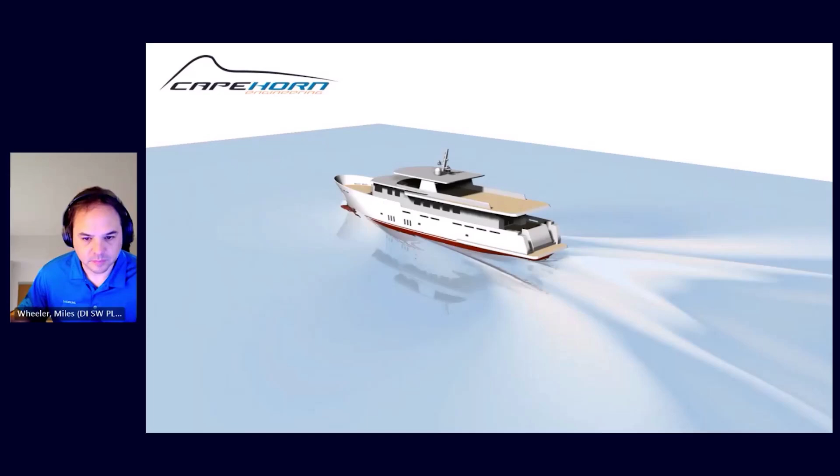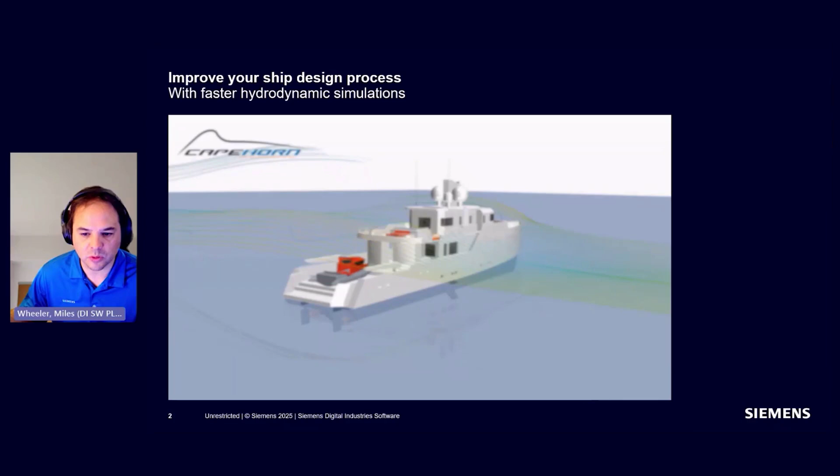Before diving into the webinar topics, let me briefly give you the context for this webinar before I show you why your next environmentally friendly ship design is closer than you may think. With the ever-increasing pressure on the commercial market to reduce emissions, you need to make radical engineering decisions faster, and for that you need simulation tools that are fast, easy to set up complex problems, can be automated, and allow you to embed best practices that can be shared across your organization and help accelerate your productivity.

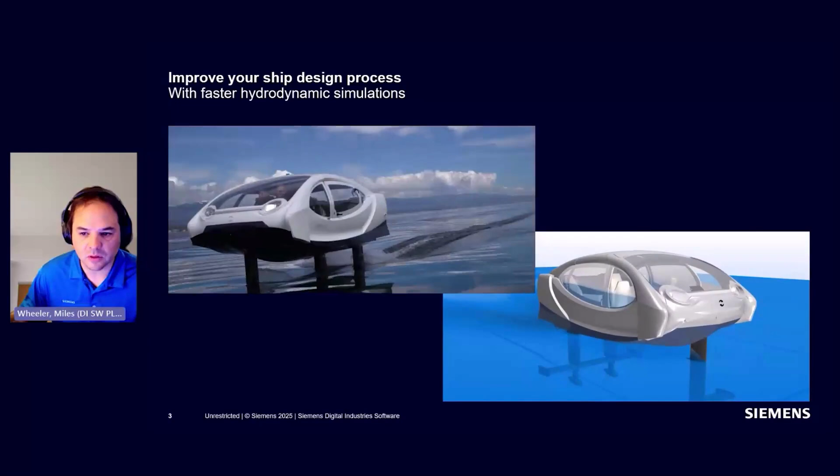Once the right tools are in place, only then can you start to consider hundreds or even thousands of trade-offs and designs early and often in the development process, which will then allow you to stay ahead of your competition with innovative designs and better performing vessels, all while reducing your cost and time to market. And of course, you always want to work with real case scenarios, like you see here, this example of a novel concept called sea bubbles, with these videos being provided to us by the courtesy of Cape Horn Engineering.

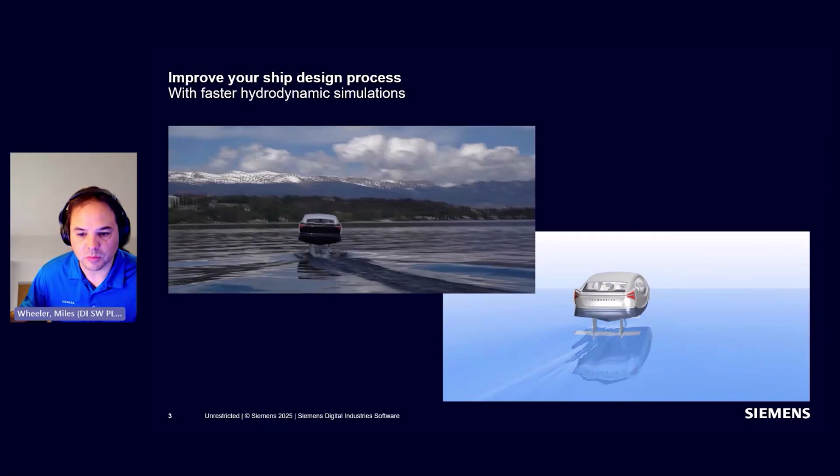Now, I wanted to take a deep dive into the enabling technologies behind the simulations we just saw. Let me introduce myself. My name is Miles Wheeler, and I'm a Senior Marine Application Specialist here at Siemens. I primarily focus on the use of Simcenter STAR-CCM+ for the maritime industry.

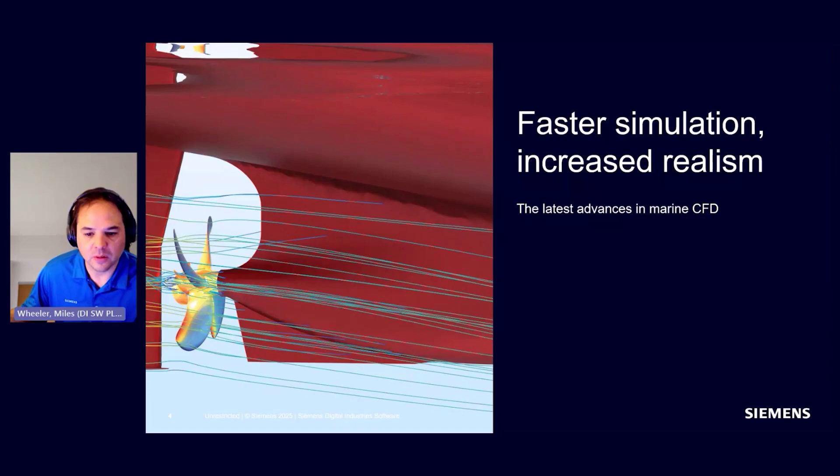Then, over the years, tools have been introduced that make it easier than ever to create your simulation models. Surface wrapping, automated meshing, pipeline workflows. The advancements in available tool sets allow people to build highly detailed models much more easily and quickly. But it still required a highly knowledgeable CFD expert to build and run these models. Although the simulations were easier to build, they did take days and days and days to run.

But what if I told you we were at the turning point to the next step? Automated and faster workflows, complex simulations with the touch of a button. Well, that is what the focus of this presentation is about. And I plan to focus on how you can get better information and increased realism out of your simulations, all while speeding up your simulations from weeks to hours while using easy to use templated setup files in our latest technology.

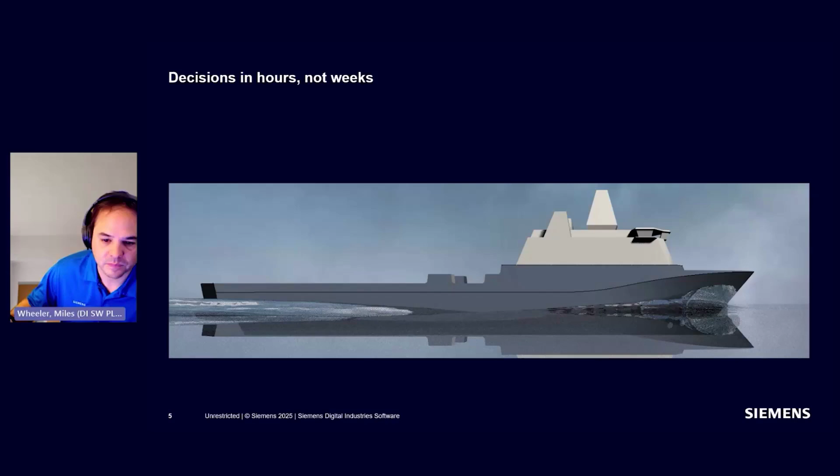To illustrate my point, I first want to walk through what most people would do to set up a standard case or ship resistance case in a CFD tool.

First, we have to import the CAD model. We have to ensure it is oriented correctly. We need to confirm the quality of the CAD. Then we have to determine or apply the mass properties to ensure the model is placed just so in order to have the simulation run smoothly.

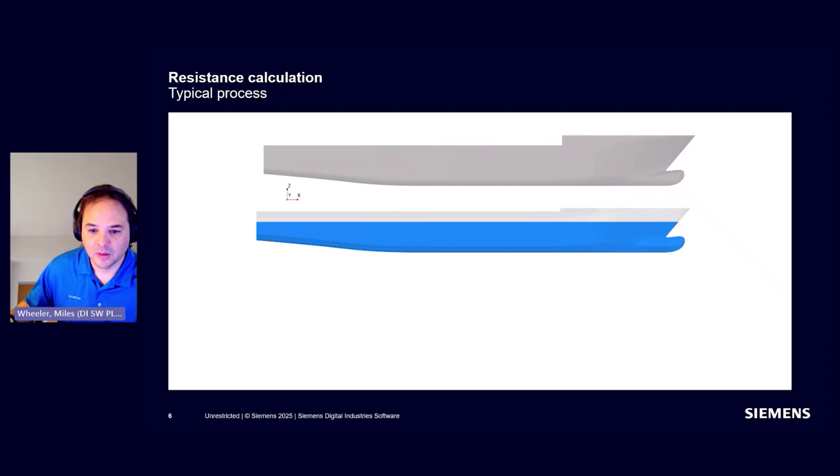We have to determine the hydrostatic properties such that the hull center of buoyancy is aligned with the center of gravity and is displacing the appropriate amount of water. Then we have to think about how to build our mesh. For marine cases, we have to think about how high the generated waves will be, the proper mesh transitions, and where the generated wakes will be.

This can be a cumbersome process with several hand calculations and typically about a dozen boxes to create the settings and capture all aspects of the model appropriately. But not only that, we also have to worry about what is going on in the boundary layer and the appropriate way to capture it. What are the appropriate Y+ settings? How can we smoothly transition the prism layer into the core mesh?

What is the appropriate cell size for this model? How can we build a mesh that is accurate but also runs quickly? And this can take several iterations and often requires a lot of thought. Then we need to think about the physics of our problem. We need to set up the solvers.

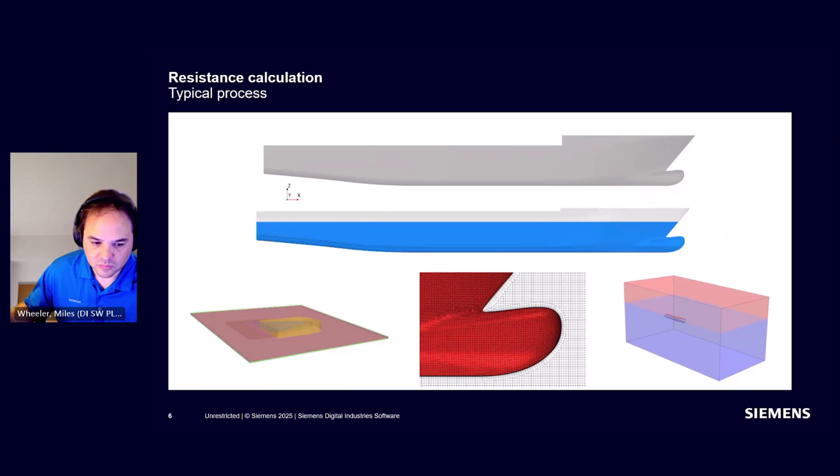We need to think about what type of turbulence models we want to use. What is the appropriate time step? We need to determine how to set up the free surface conditions and how to apply all of the relevant boundary conditions. But what if instead, all you had to do was input the CAD, set the draft and speed, perhaps add a propeller, and that was it?

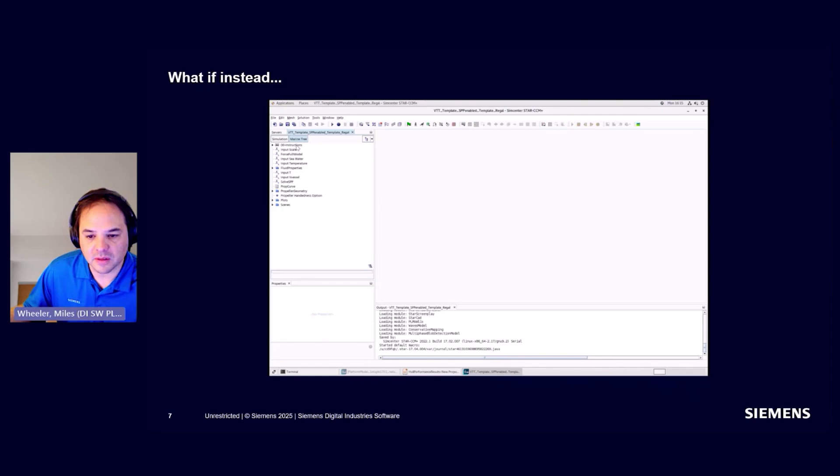Well, Simcenter STAR-CCM+ now has the full capability to take out most of the manual processes involved with building a CFD simulation via our parameterized template modeling capabilities. What we have here is what we call the VTT template, which allows a user to automatically run a resistance or self-propulsion analysis at any scale with just a few inputs and clicks of a button.

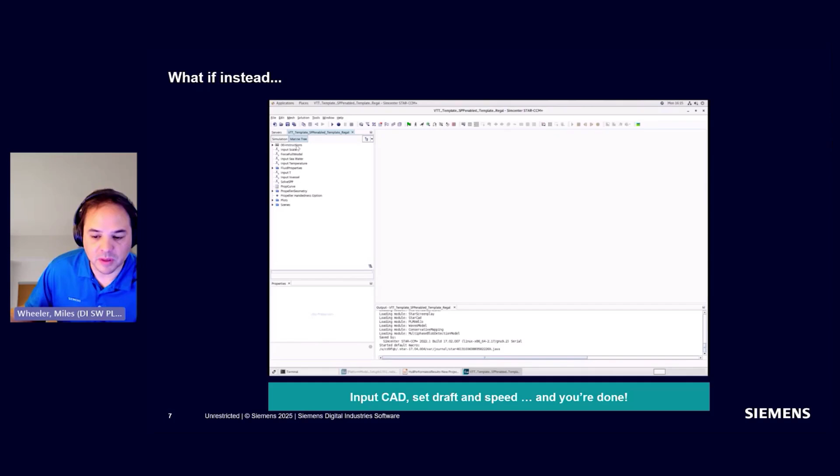Simcenter STAR-CCM+ has the ability to parameterize most things in the tree. And if you think about it, most of the meshing and pre-processing decisions for a ship are based on the geometry, the speed, and the displacement of the vessel. With the addition of these simulation operation tools we have in Simcenter STAR-CCM+, all of these calculations and thought exercises can be completely automated without the need for any scripting and embedded completely into your simulation template.

Here's an example of how it works. When we open up the template, we get a custom tree as well as instruction scenes that tell you exactly what you need to do. You can navigate and import your hull geometry and it will import into the scene. We'll then give you the dimensions of this part and you can easily scale it if you want to go from full scale to model scale or model scale to full scale. And all the relevant input properties are displayed in the scene.

We then have a few different options. We can have a full model or a half model, so you can assume symmetry or not. You can input the properties of freshwater or seawater via a table, or input them directly. And then we set the draft and we set the speed that we want to analyze.

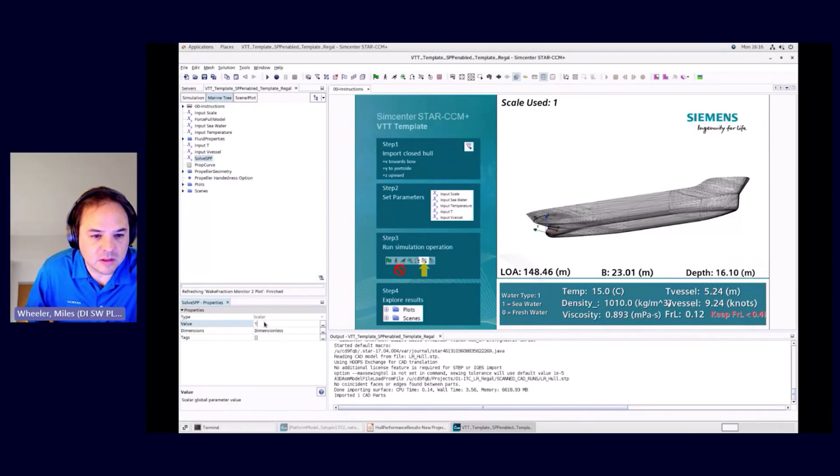If we want to run a self-propulsion calculation, it's simply setting a parameter that says, yes, let's include the propeller. And here we have what we call a virtual disk, which allows us to mimic propeller behavior with the use of open water propeller curves. And of course, we can then import those curves and change the dimensions of the propeller as needed for the particular problem. We can move its location and change its diameter and inner hub radius if we need to, as well as change the propeller rotation.

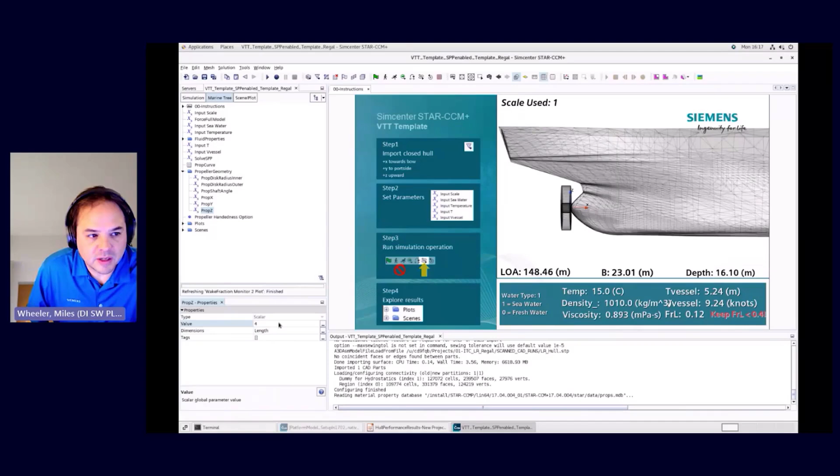And as you see, we really simplified the tree. We can reduce the model tree that is exposed to the user just to the inputs needed for the model. And once everything is input, just a few different inputs to set up a self-propulsion calculation, we run through these simulation operations, and that's it. All of your pre-processing, meshing, running, solving, and post-processing steps are automatically executed for you.

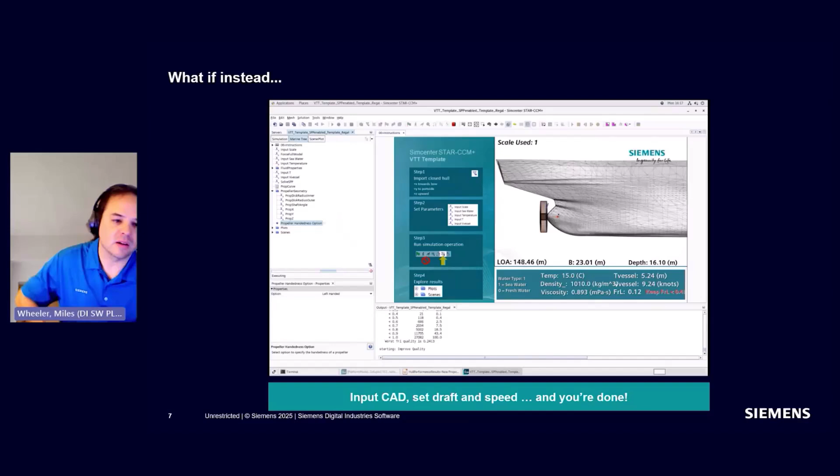But what's even better is the template is completely open, which means that you have access to all the controls you normally would if you built the model by hand in our commercial product. So if you and your company have any secret sauce or you want to embed your best practices into your file, you can do so. It doesn't require any new release, doesn't require a new script, doesn't require anything else except for you to go in and change it on your own.

You can make the change just as you normally would, and then you can continue using your template in the same manner. This is not a black box solution. It's completely open and transparent, and you have the ability to edit and do these templating steps yourself. Then, whenever you reload the model, as I mentioned, you can expose just the key inputs to the tree.

This helps you ensure that the best practices for your organization will automatically be populated and used, which will then ensure better quality control of your simulations and less time spent on policing others' work, because when people are working with this tree, they're not going in and changing solver settings, they're simply changing the boundary conditions of the model, and everything else is done exactly the same way, regardless of who is using the file.

And one thing I also wanted to point out is while we showed the manual setup process, the template can also be run in batch mode, which means that you can take any of the boundary conditions or perhaps even look at different hull files and set those up to be a parameter. And then that gives you a one-click solution to go from your CAD to your resistance or propulsion or powering calculations. It doesn't have to be a walkthrough wizard if you don't want it to be. You can have it be a one-click solution executing in batch.

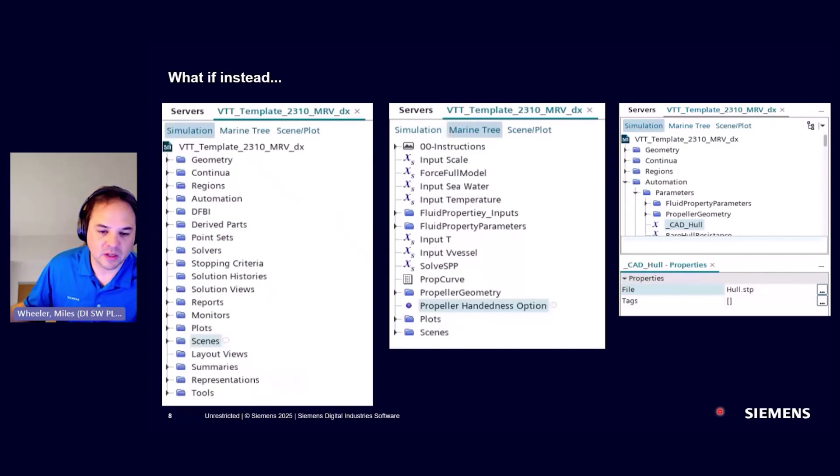And with the use of our design manager tools, you can do design explorations on hundreds or even thousands of designs, all with the same template file without having to even interact with it or open it if you don't want to.

Now, you may be thinking to yourself, that's great. The template saved me some pre-processing time. You have probably done something similar or have even seen templates before. But it still takes several hours to run a simulation. The pre-processing time is perhaps just a fraction of the total time it takes to get a CFD result. Well, that's actually, in my opinion, not necessarily true anymore. I want to introduce you to two additional technologies available in Simcenter STAR-CCM+ that will allow you to make your runtimes even faster. First one is multi-mesh sequencing, or MMS method.

The MMS method is simple. You define a final target mesh for your simulation. This is automatically defined in the template file. However, to develop the flow field, it can be cumbersome to have to do this on a very large mesh. So why not just do this on a coarse mesh with less cells? Well, we can. By using this coarser mesh, we can develop the flow field and wake structure much, much faster. We can then converge the mesh and map the solution to a slightly finer mesh and repeat the process until we reach our final target mesh.

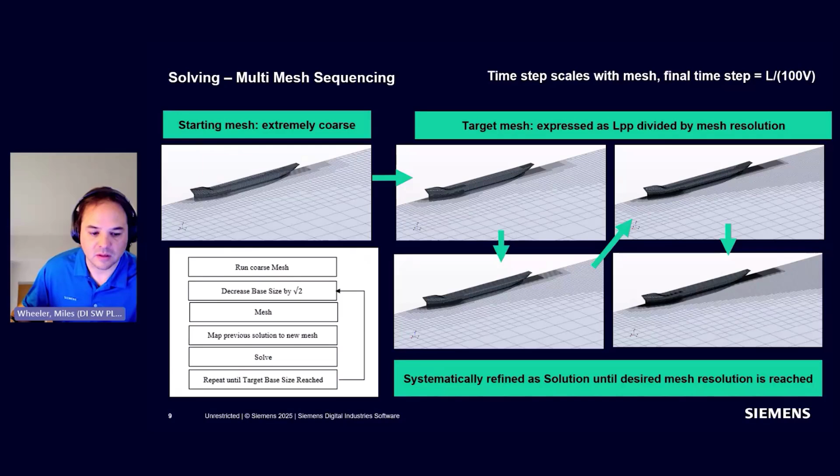And by doing this, we can save a lot of time of continuously using finer and finer grids while we develop the flow field, and only using a detailed grid once we have an almost converged solution as the initial condition. The best part of the method is that it uses simulation operations to automatically do this process. This means every setting is determined and embedded directly into the sim file, which means that the MMS method is script-free.

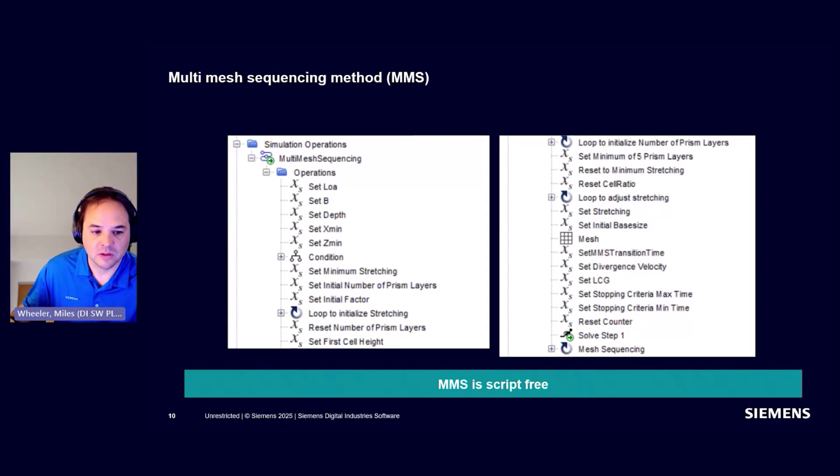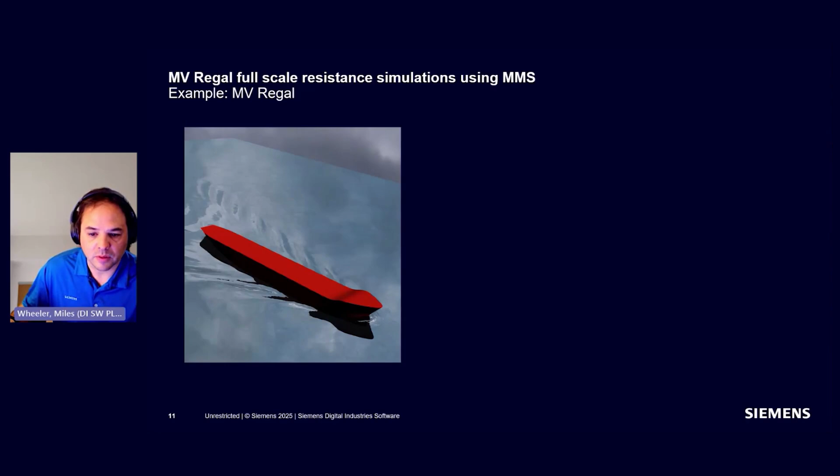And we have extensively tested the MMS method against our previous best practices for several different cases. One such case is the Lloyd's Register blind CFD benchmark case. And I wanted to point out a few things. First, the workshop is publicly available, so we can compare data freely. In this benchmark, we analyzed the resistance versus speed curve in calm water for over 4 speeds.

And we compared the median of the workshop data to our previous best practices and our MMS method. There's really no difference in the results with the MMS method, and the difference from the median is that it's a statistic based on submitted results. It's not actually comparing to any experimental data.

And when we actually did this benchmark, we noticed that the results from the MMS were over 2 times faster, and they're actually even faster on other cases, typically on the order of 4 times faster. So we have a very nice method that can be implemented completely within the simulation that has a significant speed up. This means you can either analyze over twice as many designs in the same amount of time, or perhaps only spend maybe half as much time in the office if you could get away with it.

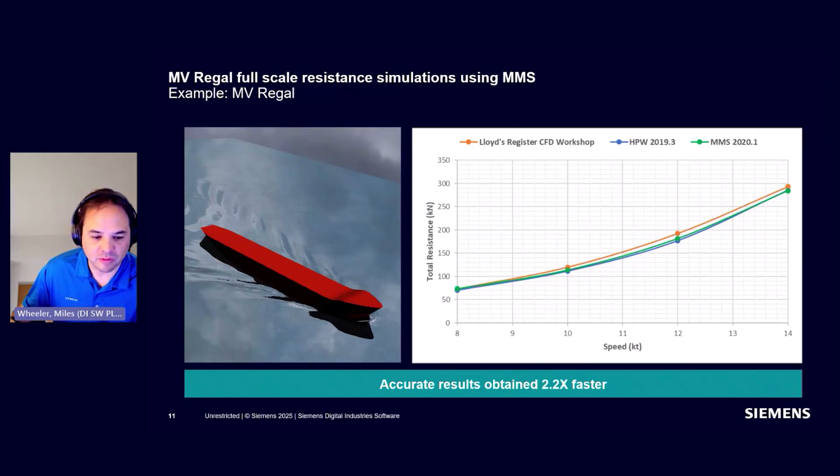But this brings me to our other addition, adaptive mesh refinement. Adaptive mesh refinement, or AMR, is another approach we have to making your simulations faster. AMR was just introduced into the code a few years ago, and we were very excited about it. AMR is a solver-based mesher that will refine and coarsen the mesh as the solution converges. This allows you to focus mesh in areas where you need it and allow you to have coarser meshes in areas where you don't. We can create any refinement operation with any of the field variables stored in your simulation.

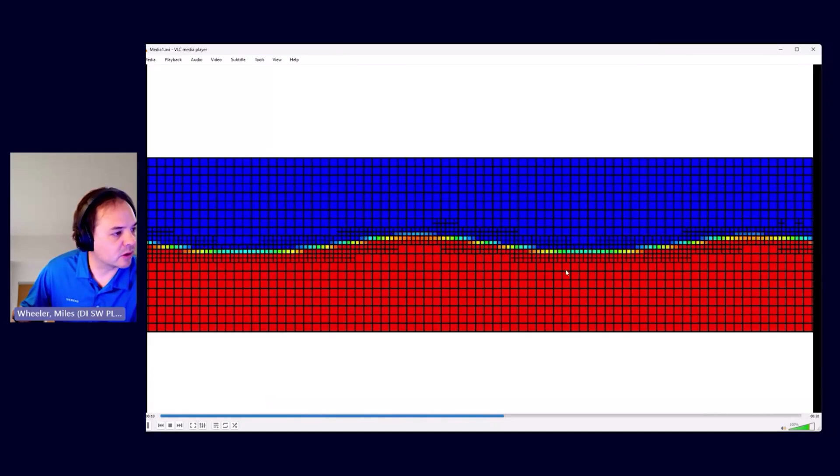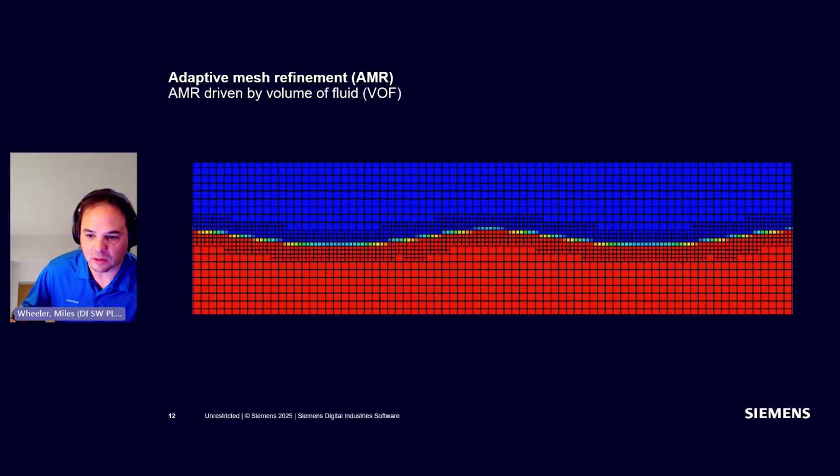But I wanted to point out two very useful model-driven applications for the marine industry that are unique to our software. First, our proprietary free surface model is being used to track and refine the free surface. The animation is not working in the PowerPoint, so let me pull it up really quick. It is here, so you can see that the free surface AMR is actually refining the head of the free surface. So that allows us to always have a nice crisp free surface as the solution develops. It's unique to our software. And it really allows you to maintain a crisp mixture with much fewer cells.

In addition, an overset mesh adaptive refinement scheme has also been implemented. What this does, it allows you to build very coarse background regions, and the adaptive mesh refinement will only refine in areas around the overset mesh. This will also help eliminate any of the overset errors you might typically encounter in these types of simulations. In this example, we can see a simple vessel maneuvering within a basin.

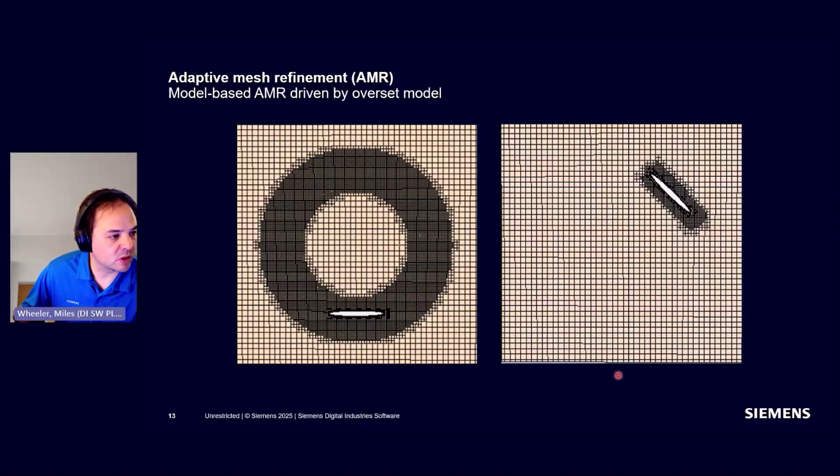On the left, you will see how we would typically have to create this case previously with the expected path of the vessel. But now, with overset AMR, we can leave a coarse background and we only need to refine as the object comes in contact with the background region, saving you a ton of cells, and overall it will save you a ton of time. But even better, in my opinion, is it takes the guesswork out of predicting where the vessel will go when you have highly dynamic cases.

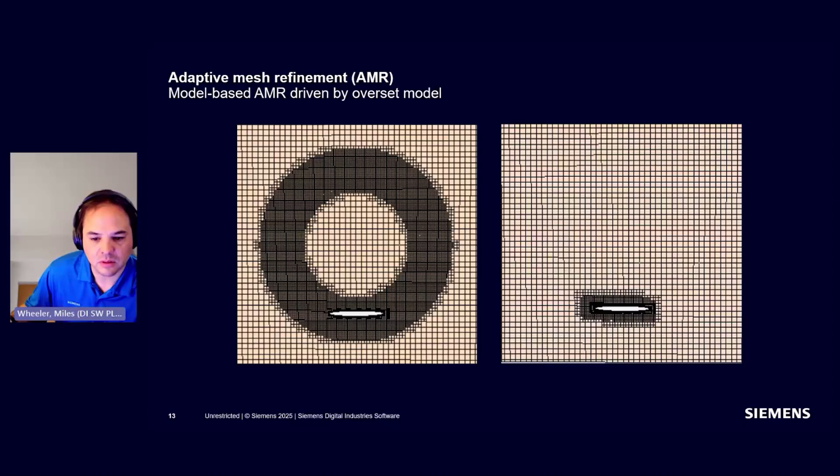And it allows you to also eliminate a lot of the overset errors you would get when trying to match cell sizes between the object and the background region. So overall, a very robust solution that saves you a lot of time. And in this particular case, we had 3 times fewer cells, which gave us 3 times speed up for the same exact case with very similar results.

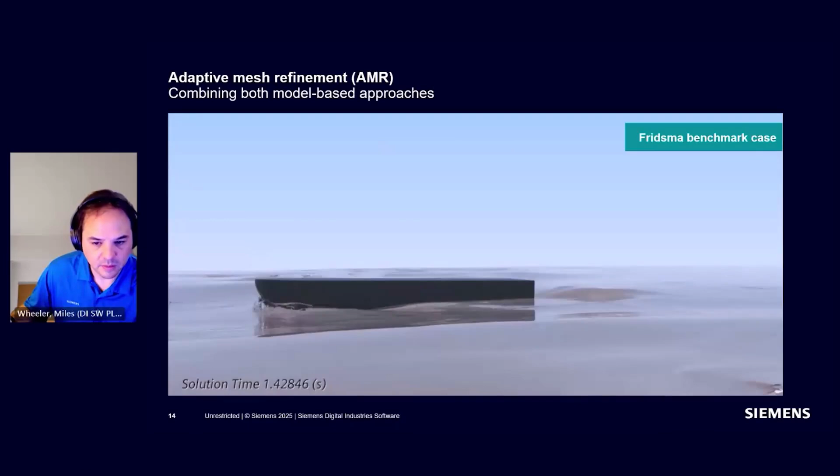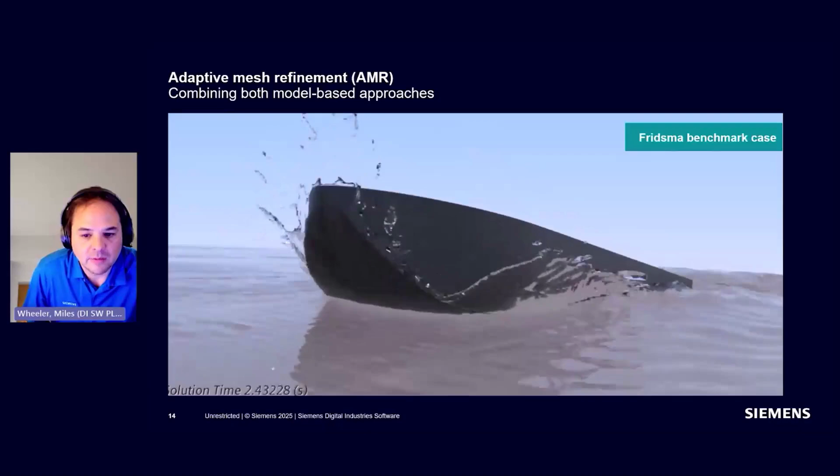Then we employed these 2 adaptive mesh techniques and we applied it to a previous simulation we had trouble with. With AMR, we were able to focus the mesh in areas where we needed it. And in this video, you can see a planing craft accelerate from rest to a steady state position with the use of our free surface and overset refinement implemented here.

They used consistent cell sizes across the bottom of the hull, since they did not previously know where the spray root lines would be on the hull. This is a standard way of addressing the problem, but due to the CPU constraints, this was as fine a mesh as they could create. And we were able to help solve this issue with the use of AMR.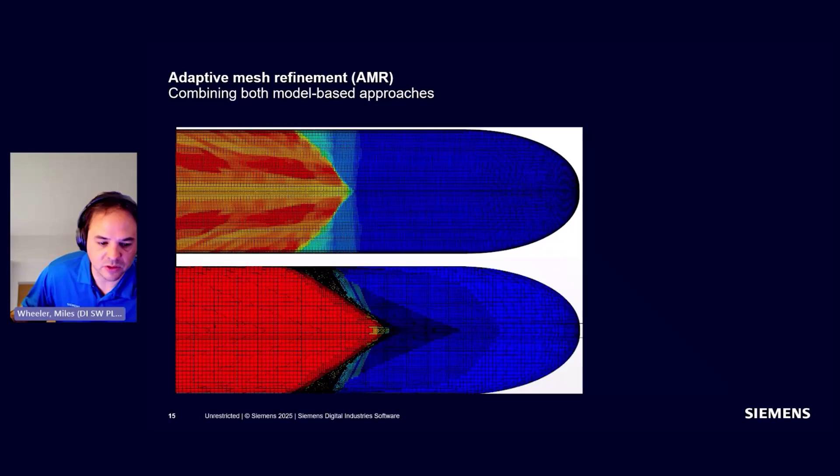Now that I showed you templates and the latest in our technology to speed up your simulations, I want to point out that Simcenter STAR-CCM+ is completely built from the ground up for design exploration. We have integrated CAD to solution in a single platform. We can link directly to most CAD packages and update designs from within our tool. We have robust and automated meshing, as well as pipeline and replayable workflows with our solution templates, as I just demonstrated. So what does this mean?

I'm talking about running hundreds of simulations at once to find the best compromise and trade-offs in the design. In this case, we're changing the design features of the hull for an offshore supply vessel by varying 14 hull parameters, looking for designs with smaller resistance, which ultimately result in improved performance.

And with the right choice of hull parameters, note the breadth of design and hull shapes that we are looking at here. And after variations have been explored, we see that we've achieved a better design than where we started, a full 33% reduction in resistance, significantly improving the hull performance. And this is what I mean when we talk about design exploration.

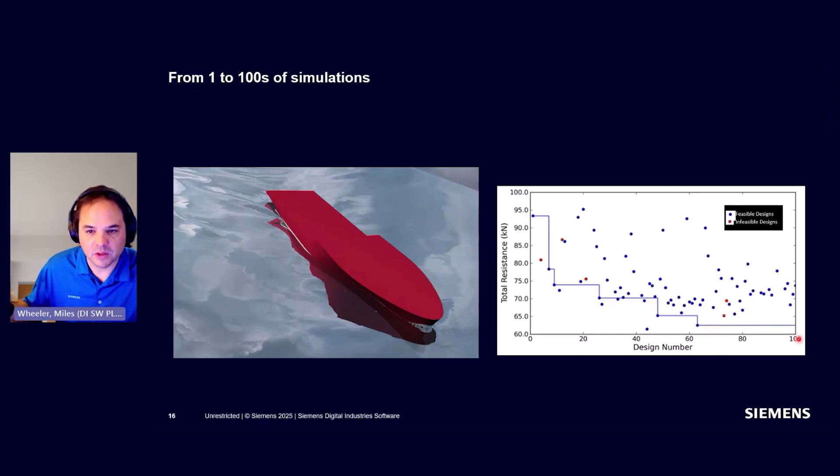I now want to walk you through a design exploration case that we recently did, in which we can go from the weeks typically needed to getting all of your data in just a few hours. Here we have what we call a multi-role vessel. This is a Siemens demonstrator vessel. It needs to be able to operate at several different drafts and speeds. As such, a full understanding of the powering or resistance requirements is needed over a range of drafts and speeds.

Particularly, we need to understand the performance between 5.5 and 7.5 meters in draft, as well as its operational performance between 10 and 30 knots. Using increments of 0.5 meters in draft and 2 knots, this would mean that we would need 55 different CFD simulations to generate the performance curves for these operating conditions.

And traditionally, this might sound a bit problematic. A single data point would take several hours, a full data set for a vessel would take several days, and the full resistance profile over multiple displacements would take weeks to do. However, with cloud computing, our Design Manager tool, and the power of our on-demand licensing, we can run all these cases while we're at lunch in just under an hour. So let me show you how to do it.

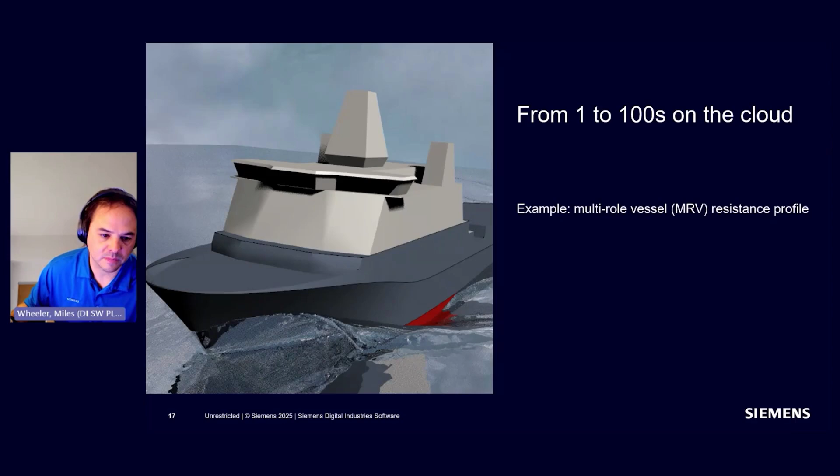I just demonstrated how you might be able to speed up and automate your simulations. And now I want to talk about how to harness these gains in conjunction with our Design Manager template file. In this video, I'm going to show you how easy it is to set up a design sweep in our Design Manager tool. We simply start off with our template. We right-click to get to a Design Manager session. And it's worth noting that doing sweeps in Design Manager does not involve any extra licensing costs.

Then we can grab any parameter defined within the template. In this case, we're interested in the speed and the draft. We grab those, and then we set up the range of each parameter. So here we've selected the parameters, and now we can give it the range that we want. Between 5.5 and 7.5 meters, and we want increments of 0.5 meters. Similarly, we can now input our speed range between 10 and 30 knots, and we want 2 knot increments.

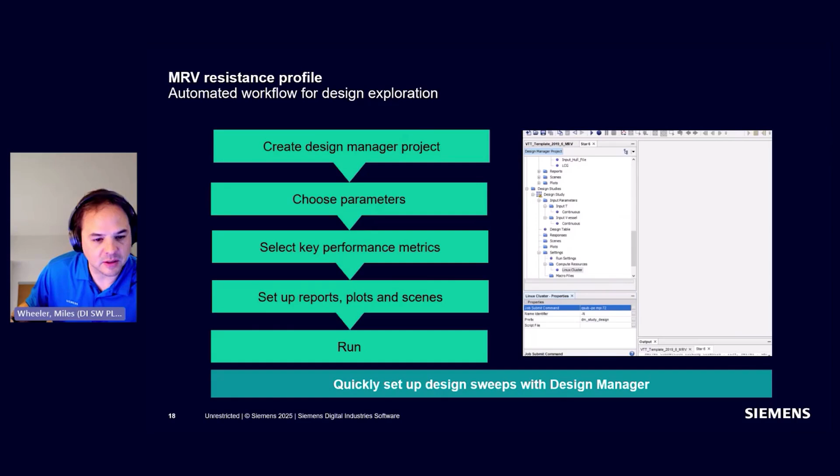And then we can set up our run settings. We want to run these on our Linux cluster, or whatever hardware you have available to you. We want to save all of our simulation files and our log files, and we want to run 55 designs at one time. The Linux cluster then tells you exactly how to submit it. That's our submit script. And this will then allow you to run all these designs at once on our Linux cluster.

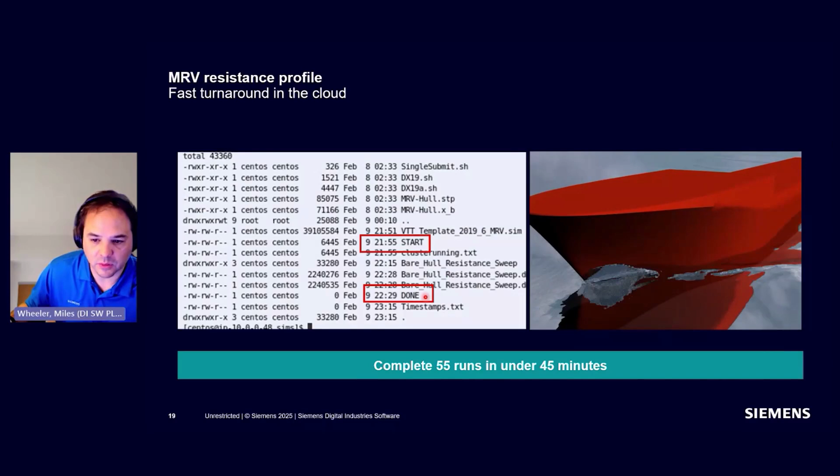Then with cloud computing, you can get as many nodes as you need. It allows for easy on-demand compute nodes, and you can build a cluster and only pay for the compute nodes as you use them. Once you build a cluster, you can easily copy files and submit the Design Manager job, and it's as easy as typing in a simple command to submit the file. And then in about 5 to 10 minutes, your cluster will be built. All your jobs will be running. And in 45 minutes here, it actually completed all of the runs. The results are stored in an easy to manage file. We can download the file back to our machine.

While we ran very quickly, I also wanted to point out a few other things. We used our on-demand licensing scheme for this study. Our Power on Demand licensing scheme is priced by the elapsed simulation hour, meaning you are not paying extra to run on more CPUs. You can use all the CPUs you want for your simulation, and the cost is the same.

In fact, you'll actually save some money if you run in the most efficient way possible, and you'll get your results even faster. In this example, I ran on 70 cores per simulation, and all runs finished between 15 and 30 minutes. The total cost to perform all 55 runs was under $500 US, with price per run varying between $7 and $14 per simulation, which I personally think is quite reasonable.

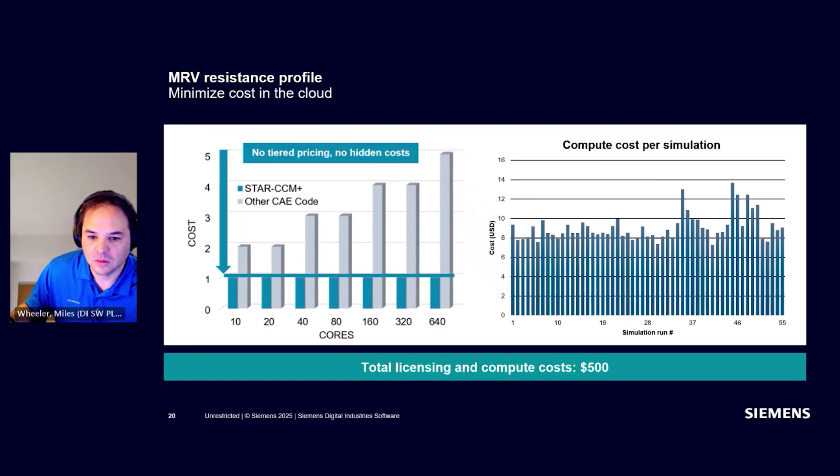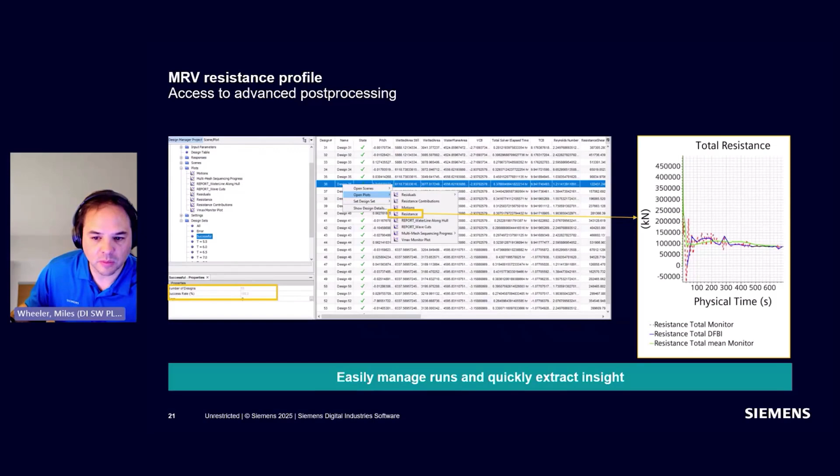And we can look at the file, make plots, and confirm the results. In this case, it's clear all runs finished successfully—we have all these check marks here. All the results are stored in an easy to read table, and you can pull up all the plots and images as you scroll through results, all within one database.

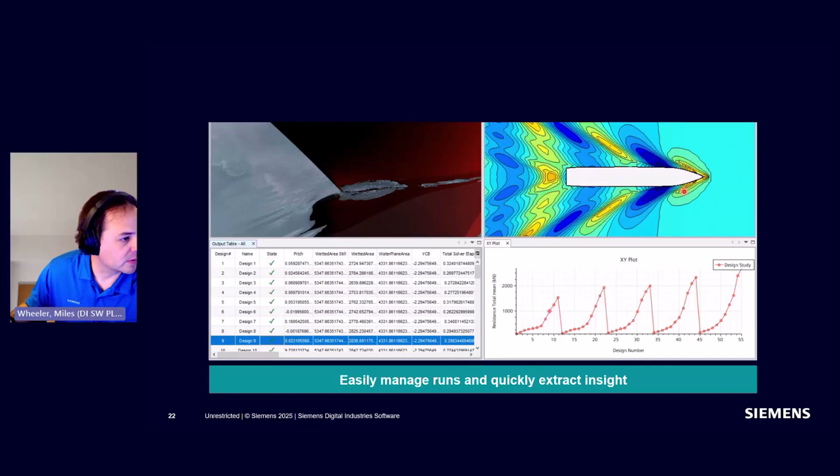Which is what we're going through here. We can look at each individual design, see what the resistance is, take a look at the generated wake, look at the bow wave. We can look at really whatever metric or visualization we want, all within a single environment, which allows you to really easily understand your results as you go through them.

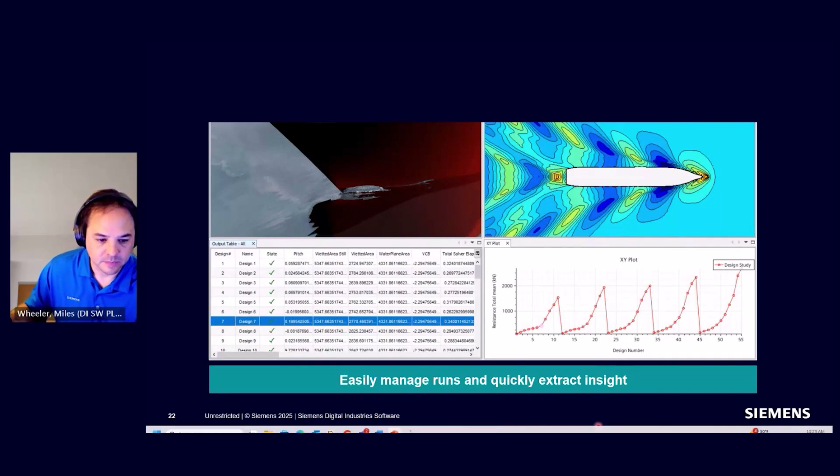Now, let's switch gears. Now that I've shown you ways to improve your productivity and save time, you will probably have the time to do more sophisticated analyses and increase the realism of your simulations.

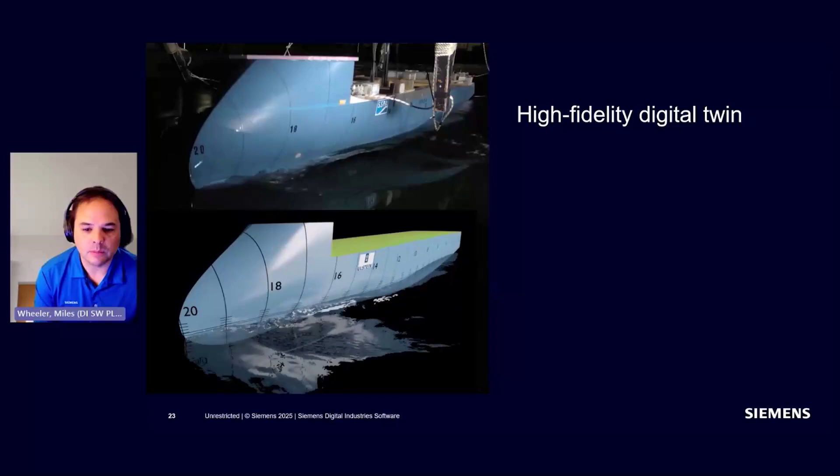The first example I would like to show is some work done by our customer CETENA, who simulated the launching procedure with the help of our engineering services team. The ship that needed to launch was the largest ship ever created at this particular shipyard. The size of the ship, the departure angle, and shallow water in the bay had the shipyard worried about a successful launch.

There were clearance issues critical to the concern of the propellers and rudders. The shipyard significantly relied on hand calculations that assumed large margins of error, and these processes were okay, but given the size, it was not possible to rely on these methods. The traditional launch calculation methods were purely static and neglected free surface deformation or wave pattern, interaction with the seabed, surrounding structures and the quays, and any inertial effects. Detailed computation of resistance and effects of the appendages and propulsors were not carried out with these older methods.

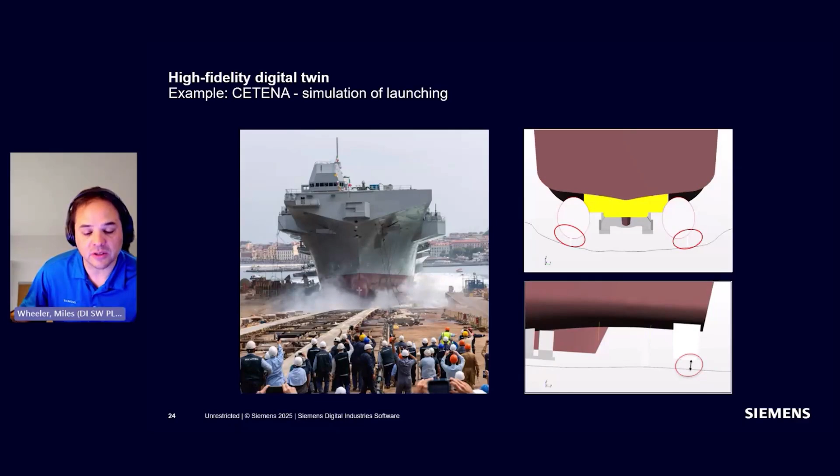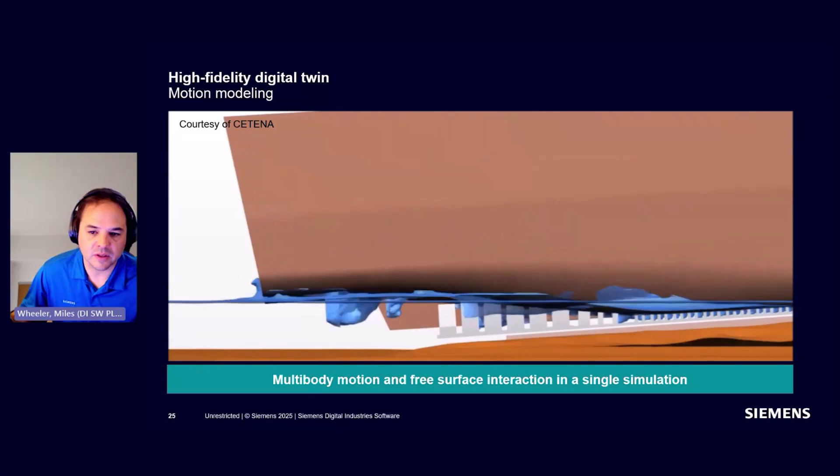So with their worries, they needed a more high fidelity analysis. They turned to Simcenter STAR-CCM+ and our Siemens engineering services team to help them out. They ran several simulations with contact, complex motions, appendages, multi-body interactions, and free surface interactions to figure out what set of parameters could produce a safe and successful launch.

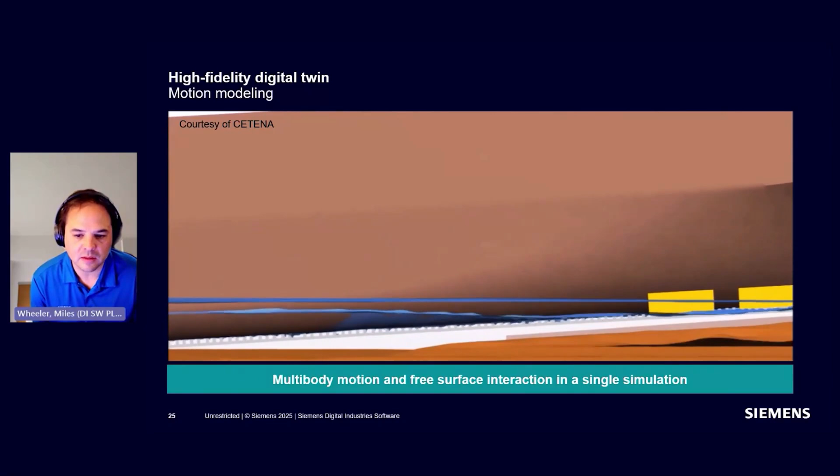As you can see, there were tight clearances on the worrisome part of the bay floor, where the simulation provided enough fidelity and insight to figure out what could possibly work. It was determined that a safe and successful launch was achievable based on simulation. At the end of the day, the shipyard was able to successfully launch the largest ship it ever produced in some terrifyingly shallow water, not much of an issue.

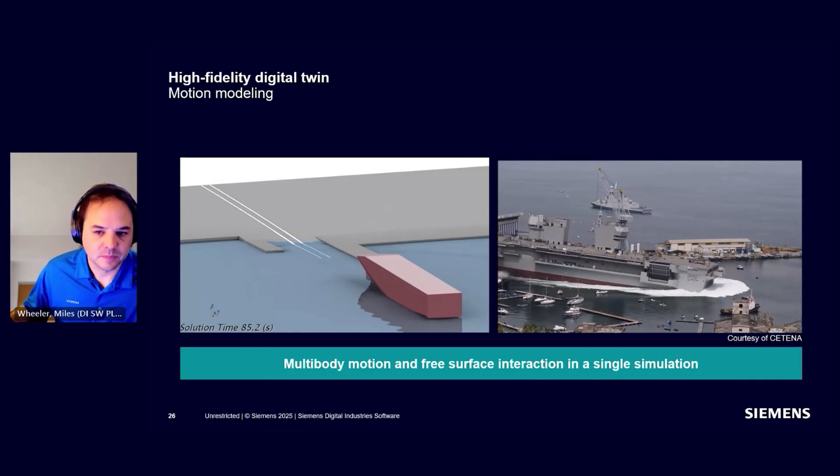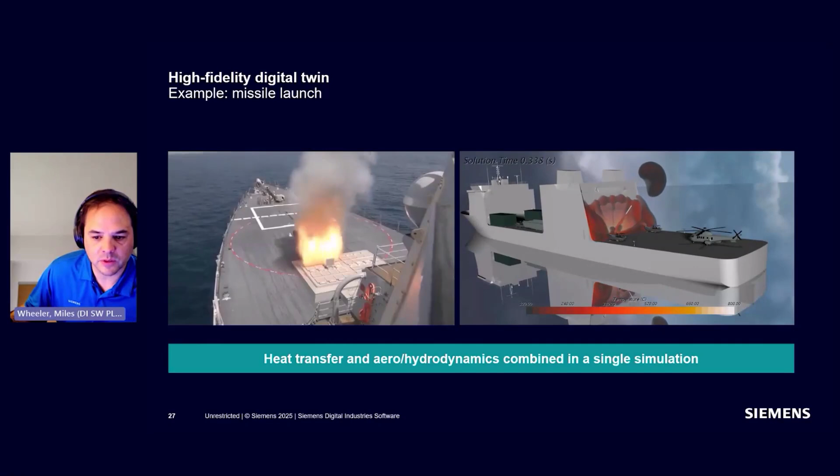Next, I wanted to point out our capabilities for rocket launch combined with hydrodynamic and aerodynamic simulations. Here you can see a YouTube video of a rocket launch by the US Navy. The fumes and flames are very high before the rocket is even launched. We can simulate the same conditions including heat transfer, compressibility, and high-speed aerodynamic problems in conjunction with our hydrodynamic capabilities, all within a single simulation.

We can see the generated shock waves and how they might affect important things on deck, such as helicopters, cargo, people, what have you. And we can also look at the plume effects, giving us great physical insight into any type of launching situation.

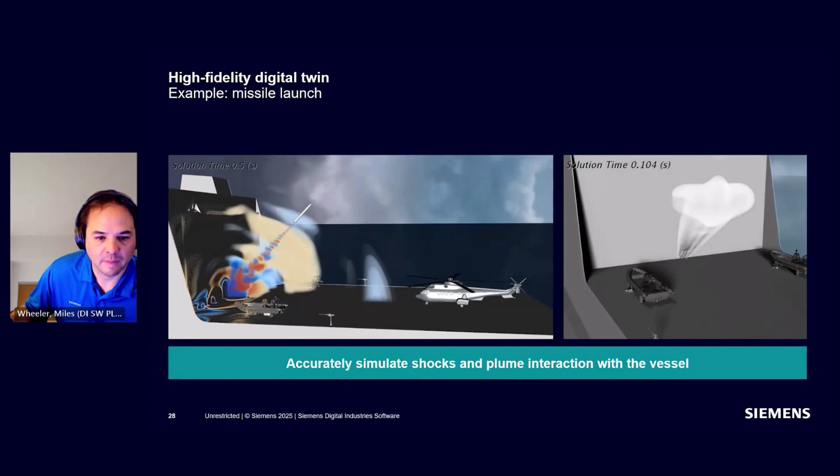We can see how the gases are dispersed on deck and see if that might affect anything critical on board.

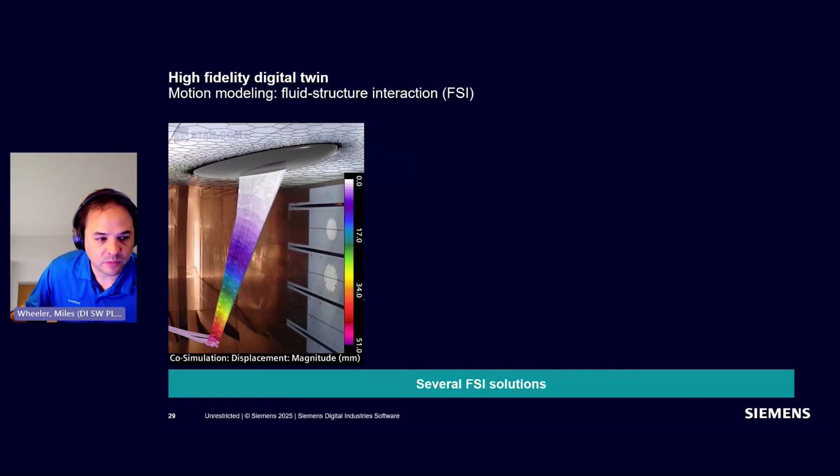The other thing I would like to point out is some of our fluid structure interaction capabilities. We have one-way coupling, two-way coupling with SimCenter Nastran and other finite element codes, and two-way coupling embedded completely within SimCenter Star-CCM Plus.

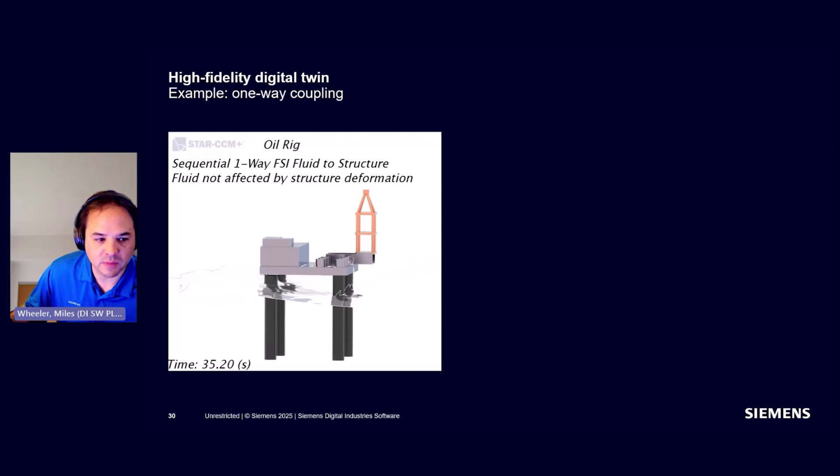In this animation, we can see how we can optimize the structure with our one-way coupling techniques. If the wetted surface area remains relatively unchanged, we can map the wave impact onto the structure and optimize the structure using input loads from our design exploration tools.

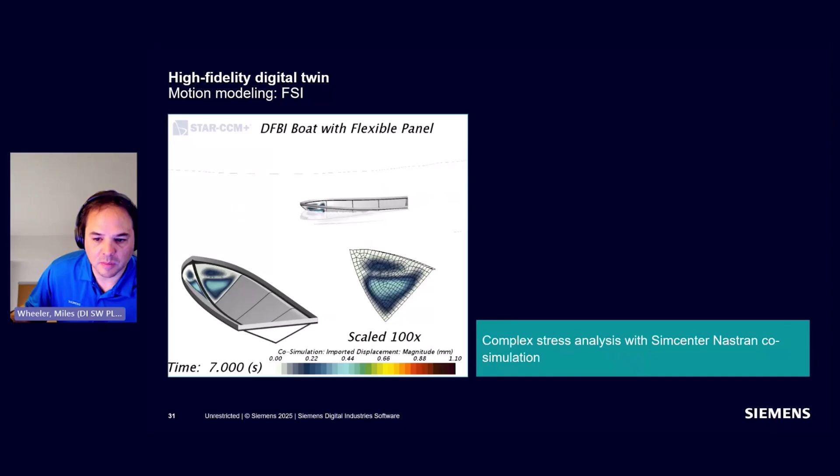This is the type of fidelity insight that can be looked at with our seamless SimCenter Nastran and Star-CCM Plus two-way coupling offering. There's a socket-based coupling that can link any FEA model with our high fidelity CFD capabilities.

But SimCenter Star-CCM Plus also has a 3D solid finite element solver that can easily map with our fluid solver. This allows for seamless FSI integration into a single simulation platform.

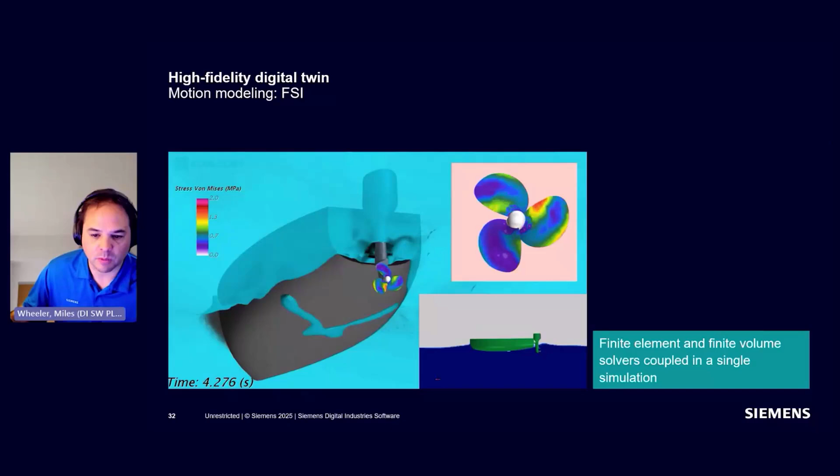In this case, we can see how the deformations of the propeller might affect the thrust and the corresponding motion of the vessel. For our advanced FSI capabilities, we can get true realism into our designs by understanding how the structure movement can affect the performance of the vessel in several different scenarios.

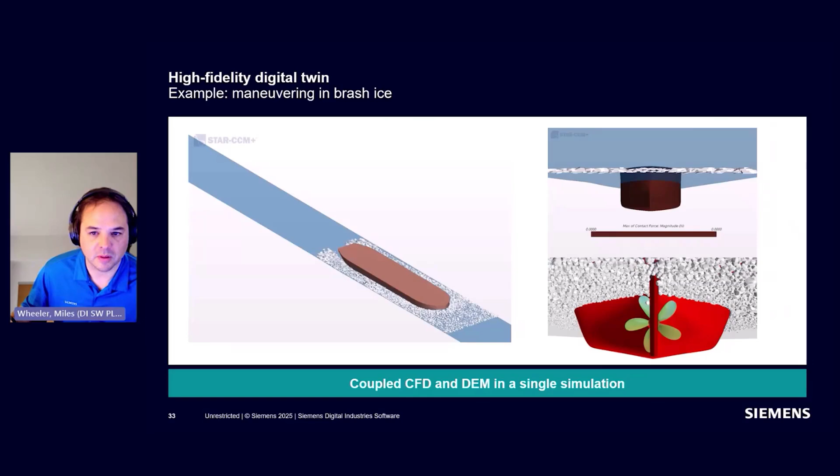SimCenter Star-CCM Plus also has the ability to be coupled with SimCenter Amesim, our 1D solver tool. And we have the ability to couple with generic models via our FMU and FMI co-simulation interfaces.

In one-way coupled simulations, you can take your resistance calculations and determine the range, the fuel burn, and the emissions requirements by incorporating this high-fidelity CFD data into long-range 1D system simulations.

On two-way coupling, we can integrate our motor effects into our CFD simulations directly to help understand how the engine, propulsor, and hull all interact together. This can help you solve your time-to-plane problems with credible insight or help understand your engine effects in extreme maneuvering conditions. We've had webinars on this topic in the past, so please look those up on our webinar website.

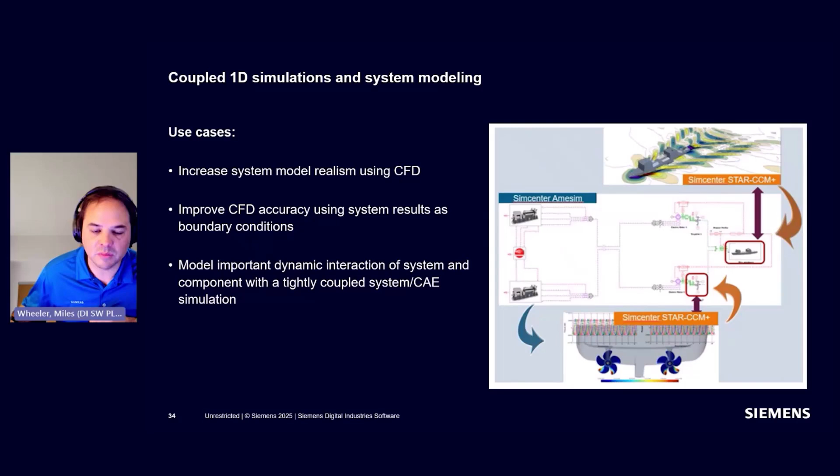If you're interested in this capability, I would highly encourage you to take a look, as it really is a unique solution offering from Siemens that can give you a lot more insight by coupling these two solvers together.

And that concludes my presentation. I do want to thank all of you who have attended. I think I have shown you how some of our advanced capabilities allow you to add more fidelity into your simulations. I've demonstrated how we can easily run hundreds of designs in a matter of hours by using our automated simulation templates, as well as our design manager tool in cloud computing.

And I hope you will agree that we are entering the next stage of the simulation world. Hopefully you will believe now that anyone can have access to a high fidelity simulation in an automated fashion, and that this will allow you to create better designs and do some very novel and unique things in the near future. So thanks again.